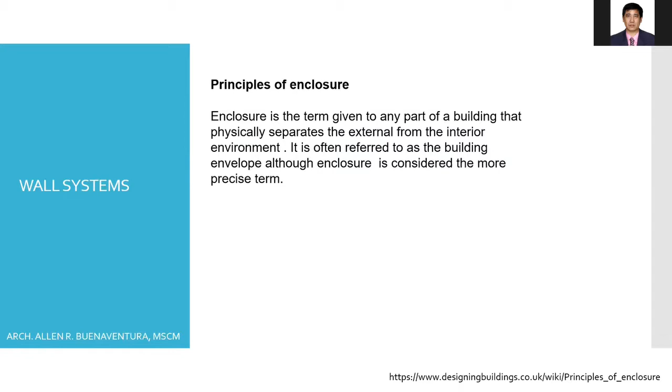Wall systems. Principles of enclosure. Enclosure is the term given to any part of a building that physically separates the external from the interior environment. It is often referred to as the building envelope, although enclosure is considered the more precise term.

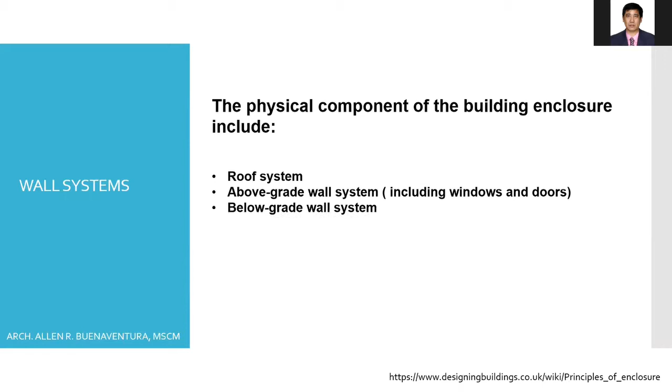The physical components of the building enclosure include the roof system, the above-grade wall system, including windows and doors, the below-grade wall system, and the base floor system. The principles of building enclosure were defined by the building scientist Neil Hutcheon in 1963.

It should have strength and rigidity, control of heat flow, control of airflow, control of water vapor flow, control of liquid water movement, stability and durability of materials, fire, aesthetic considerations, and cost.

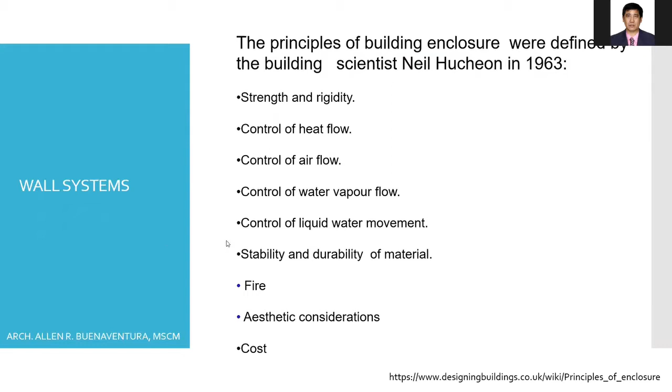Burnett and Straube said enclosure is a separation between the interior and exterior environment that experiences a variety of loadings, including but not limited to structural loading, both static and dynamic, and heat, air, and moisture loads. The enclosure must then control these loads and support these loads. This includes both short-term and long-term loadings.

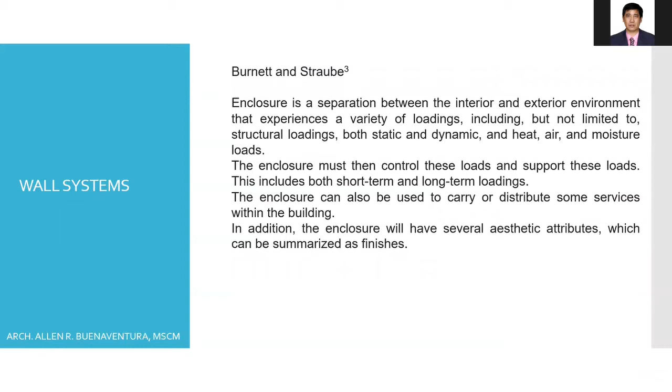The enclosure can also be used to carry or distribute some services within the building. In addition, the enclosure will have several aesthetic attributes which can be summarized as finishes. Burnett and Straube have defined 4 general building enclosure function categories. All enclosure elements have to provide the following functions.

Support. Enclosures, including exterior wall systems, must be capable of withstanding internal and external forces applied to them. The majority of these forces are structural loading. The loads include both static and dynamic loading, including but not limited to dead load, live load, wind load, earthquake loads, and possible blast loads. These loads have to be properly supported, resisted, and transferred.

Control. Enclosures, including wall systems, have to be able to control mass, energy, and particulate flow within and across the system. This includes but is not limited to heat, air, moisture, smoke, odor, fire, blast, birds, and insects.

Finish or aesthetics. The finish function of both the exterior and interior is the aesthetics of the finished surface, the visual, textural, and other aspects the designer wishes to convey with the visible elements of the system. Of the enclosure, wall systems typically have the largest consideration for finish. Distribution of services. This function relates to the distribution of services through a building, both within a single element and also through multiple elements.

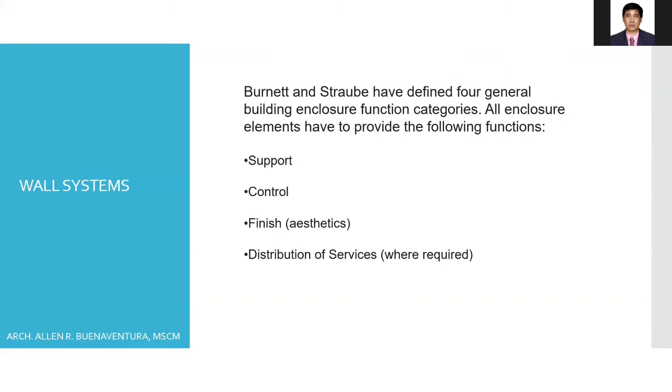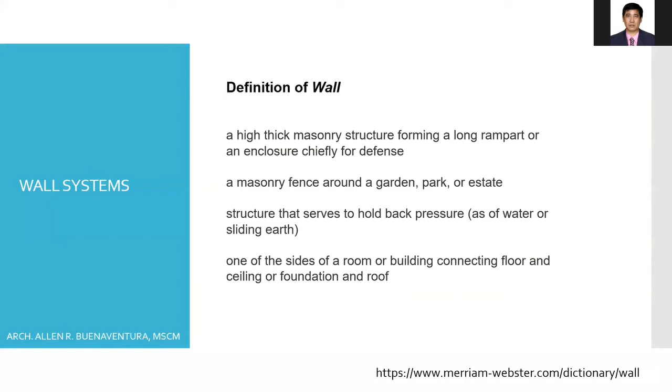The definition of a wall is a high, thick masonry structure forming a long rampart or enclosure chiefly for defense. It's also a structure that serves to hold back pressure, as of water or sliding earth. It's one of the sides of a room or building connecting floor and ceiling or foundation and roof. It's from the Merriam-Webster Dictionary. There are different basic wall types.

We have the cavity wall. A cavity wall is a wall formed by the inner skin and outer skin of masonry, sometimes referred to as leaves if they are single unit wide, connected by ties but separated by a cavity. The masonry is formed by units such as brick, stone, or block. Very generally, if the external walls of the building are less than 30 centimeters thick, they are unlikely to include a cavity.

Cavity wall insulation is used to reduce heat loss through a cavity wall by filling the air space with material that inhibits heat transfer. This immobilizes the air within the cavity, preventing convection, and substantially reduces space heating costs.

We also have the barrier wall. The barrier wall is used to refer to a system of exterior wall assembly that maintains weather tightness by preventing the intrusion of air, water, and vapor. Barrier walls rely on the integrity of the outermost surface and construction joints and are considered a cost-effective alternative to cavity or solid wall assemblies. The cladding material should be impervious to the elements.

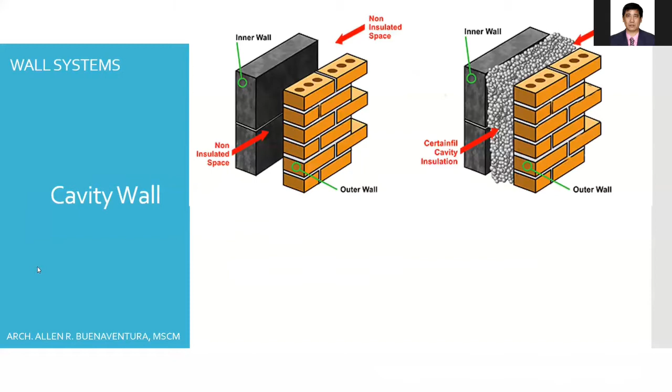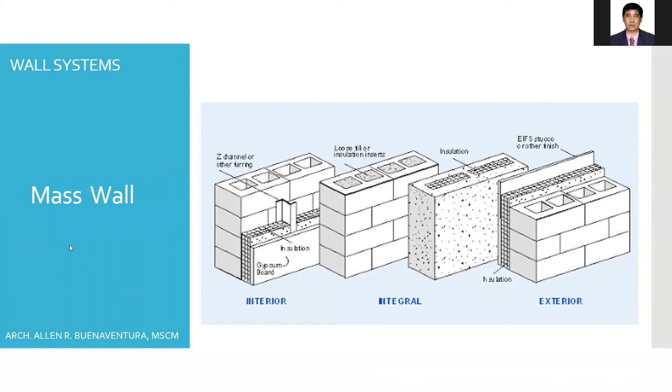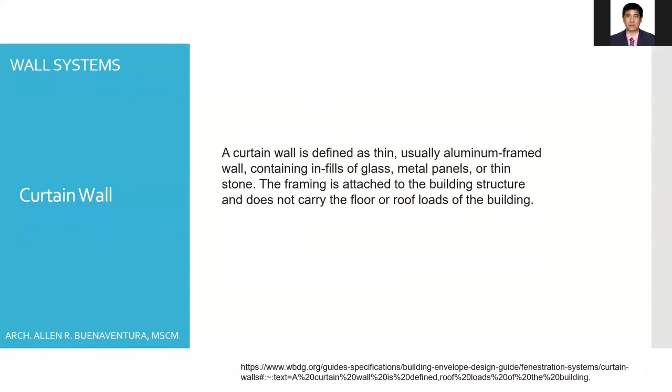A curtain wall is defined as a thin, usually aluminum frame wall containing infills of glass, metal panels, or thin stone. The framing is attached to a building structure and does not carry the floor or roof loads of the building. In the basic concept of cladding systems, we have the load-bearing wall and the curtain wall.

Load-bearing walls are walls that act as part of the structural system. They assist in supporting a building. Until late in the 19th century, all large buildings were built using load-bearing walls. Modern-day load-bearing walls usually utilize higher strength masonry and concrete and added components such as steel reinforcing, insulation cavities, flashing, air barriers, and vapor retarders. Load-bearing walls are now used in low and medium-rise buildings.

The concept of the curtain wall was developed in the late 19th century with the advent of skyscraper design. In a curtain wall system, the interior structural system supports the load of the building. The exterior wall of each floor does not support any load except its own weight and is attached at each story of the building frame. The exterior cladding is virtually a suspended curtain of material. Curtain walls may be constructed in place or prefabricated beforehand. They can consist of masonry, concrete, metal, and glass.

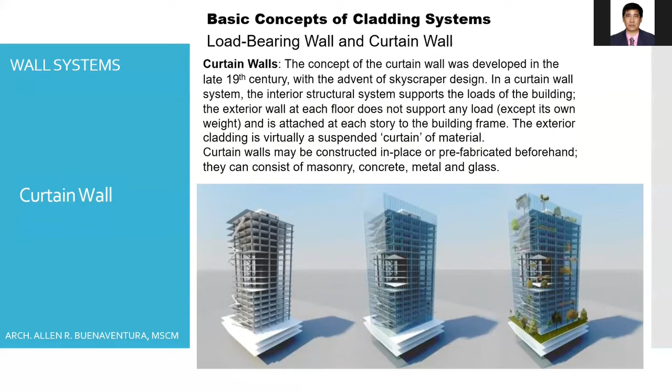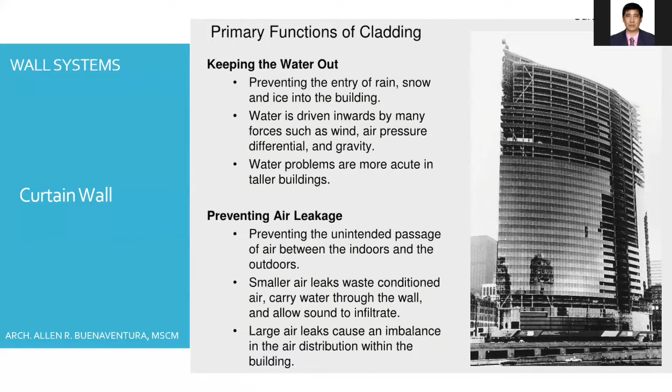The primary function of cladding is keeping the water out, preventing the entry of rain, snow, and ice into the building. Water is driven inwards by many forces such as wind, air pressure differential, and gravity. Water problems are more acute in taller buildings. It also prevents air leakage, the unintended passage of air between the indoors and outdoors. Smaller air leaks waste air-conditioned air. They carry water through the walls and allow sound to infiltrate. Large air leaks can cause an imbalance of air distribution within the building.

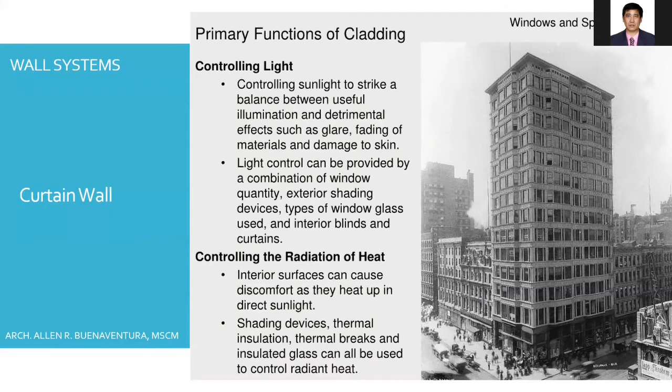A primary function of cladding is controlling sunlight to strike a balance between useful illumination and detrimental effects such as glare, fading of material, and damage to skin. Light control can be provided by a combination of window quantity, exterior shading devices, types of window glass used, and interior blinds and curtains. It also controls the radiation of heat. Interior surfaces can cause discomfort as they heat up in direct sunlight. Shading devices, thermal insulation, thermal breaks, and insulated glass can all be used to control radiant heat.

The primary function of the cladding is also controlling the conduction of heat. Resisting the conduction of heat into and out of the building requires insulation and avoidance of thermal bridges. Thermal insulation requirements often are specified by municipal codes. It also controls sound, acoustically isolating the interior of the building from the sounds of the outside. Sound requirements will vary by building type and location.

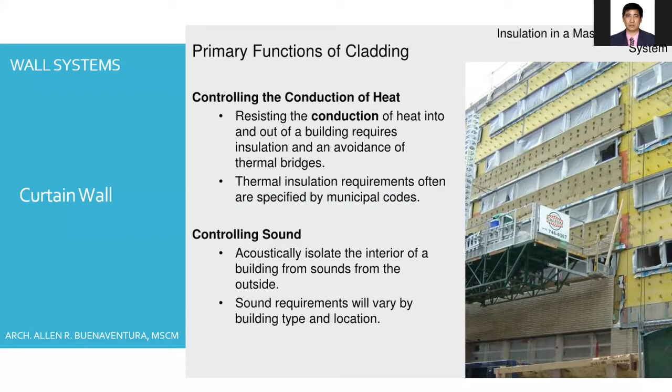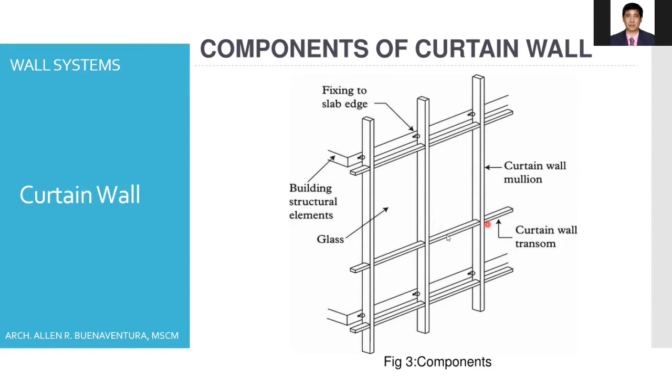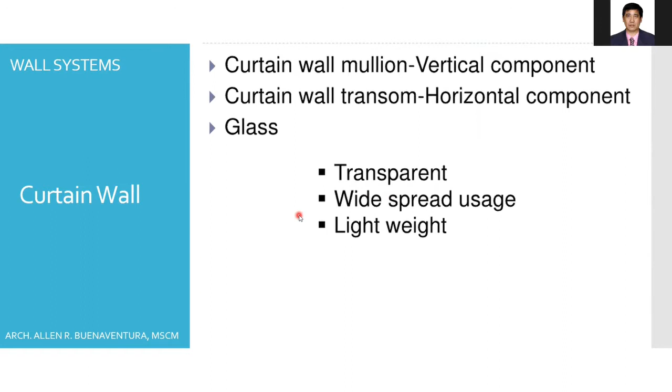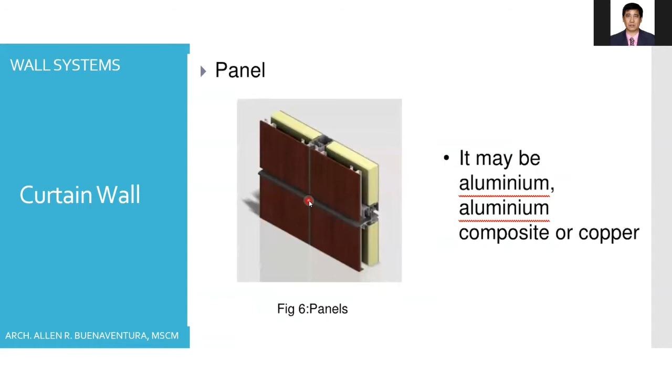These are the components of a curtain wall. We have the building structural elements, the fixing to slab edge, the curtain wall mullion, the curtain wall transom, and the panel or glass. The curtain wall mullion is the vertical component, the curtain wall transom is the horizontal component, and the glass or cladding finish can be glass, metal, or aluminum. We also have different types of cladding: the brick veneer, the stone veneer, and the panel, which may be aluminum, aluminum composite, or copper.

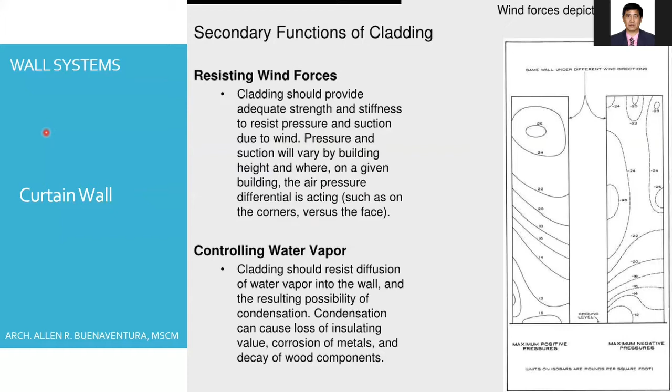A secondary function of the cladding is resisting wind forces. Cladding should provide adequate strength and stiffness to resist pressure and suction due to wind. Pressure and suction will vary by building height and where on a given building the air pressure differential is acting, such as on the corner versus the facade. It also controls water vapor. Cladding should resist diffusion of water vapor into the cavity walls and the resulting possibility of condensation. Condensation can cause loss of insulating value, corrosion of metal, and decay of wood components.

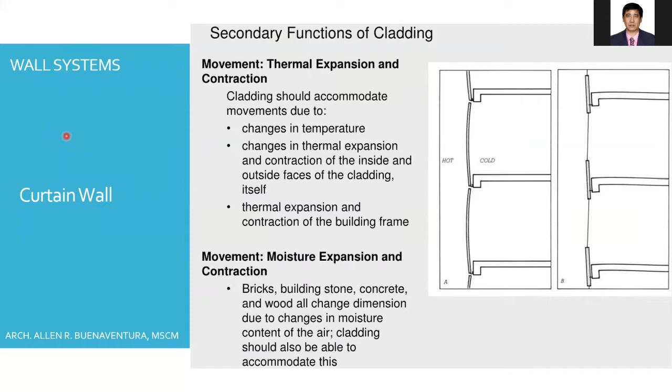Another secondary function of the cladding is accommodating movement like thermal expansion and contraction. Cladding should accommodate movements due to changes in temperature, thermal expansion and contraction of the inside and outside faces of the cladding itself, and thermal expansion and contraction of the building frame. It also accommodates moisture expansion and contraction. Bricks, building stone, concrete, and wood all change dimension due to the change in moisture content of the air. Cladding should also be able to accommodate this.

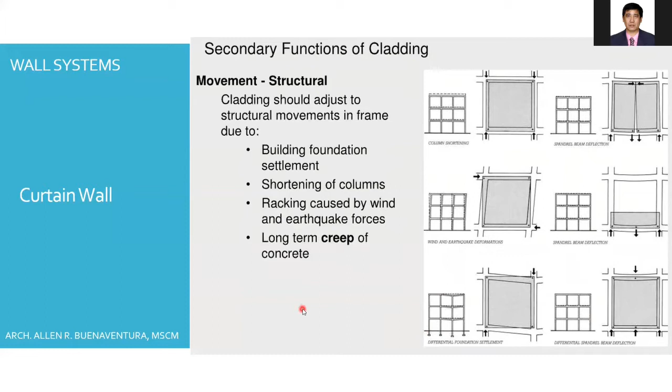The function is also structural. Cladding should adjust to the structural movements in the frame due to building foundation settlement, shortening of columns, racking caused by wind and earthquake forces, and long-term creep of concrete. As you can see here, this is the shortening of the column. This is the spandrel beam deflection. This is the wind and earthquake deformation. And this is the differential foundation settlement and the differential spandrel beam deflection. So this should also be addressed by the cladding.

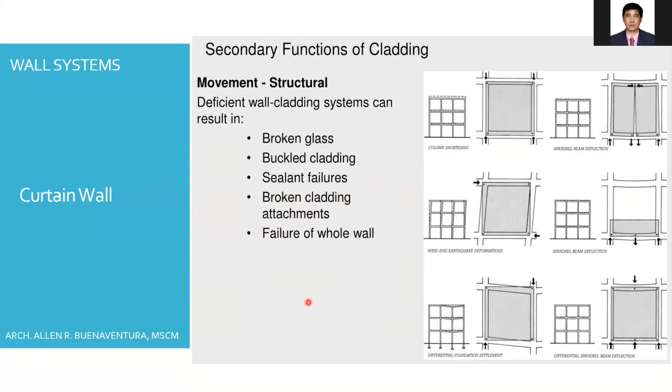Address in movement. So the cladding should have a capacity for this movement. The structural deficiency of the cladding system can result in broken glass, buckled cladding, sealant failure, broken cladding attachment, and failure of the whole wall. So the cladding should be strong enough to address all of this movement.

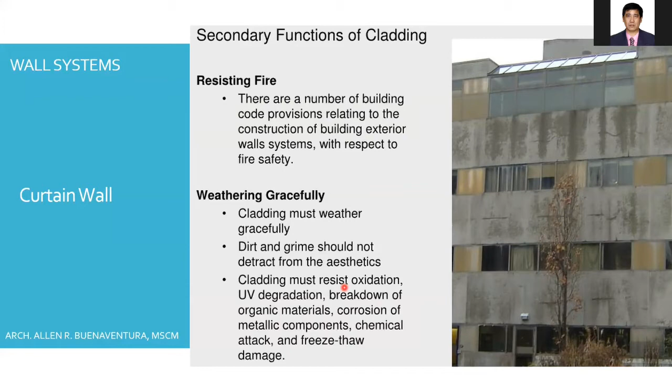So it means that the cladding can also be maintained. You can clean the cladding so that it can lengthen its time in appearance. These are the conceptual approaches to water tightness in cladding. There are 3 required conditions for water penetration. We have the water. Water must be present on the face of the exterior wall for it to penetrate into the wall. So there should be water in order to have penetration of water inside the building.

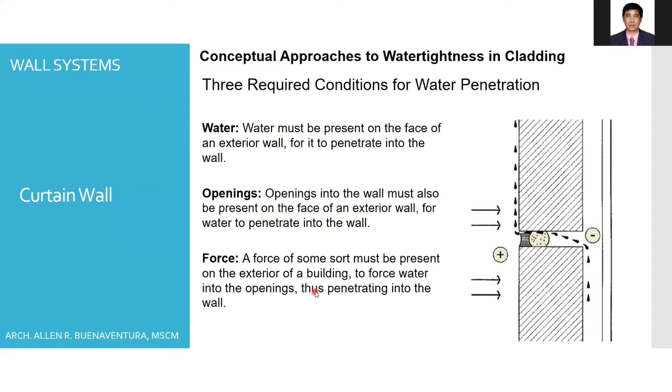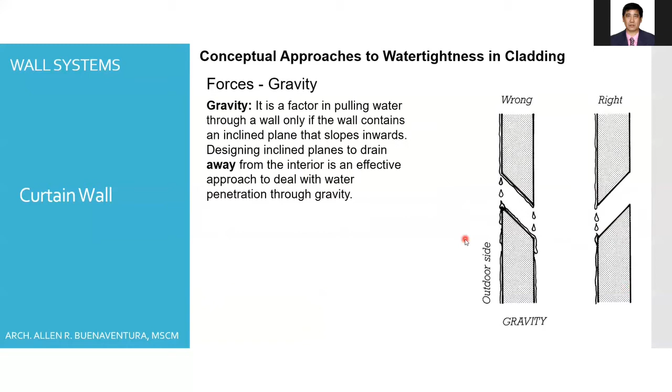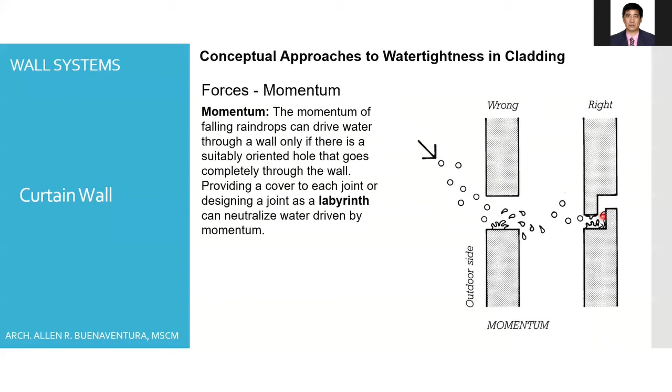Another one is the force of momentum. The momentum of falling raindrops can drive water through the wall only if there is a suitably oriented hole that goes completely through the wall. Providing a cover to each joint or designing a joint as a labyrinth can neutralize water driven by momentum. As you can see, if it's a clear opening, the water can penetrate. But if there is a labyrinth type opening, the water will not penetrate.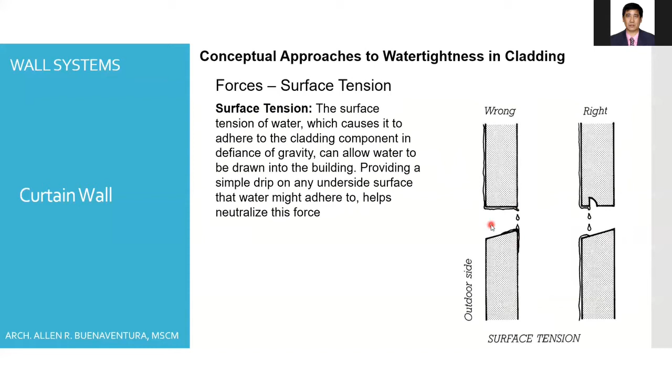Another force is surface tension. The surface tension of water, which causes it to adhere to the cladding component in defiance of gravity, can allow water to be drawn into the building. Providing a simple drip on any underside surface that the water may adhere to helps neutralize these forces. As you can see, if there's no drip mold on the upper part of the cladding, the water can penetrate inside. If there is a drip mold, the water will drip before penetrating inside the cavity or the opening.

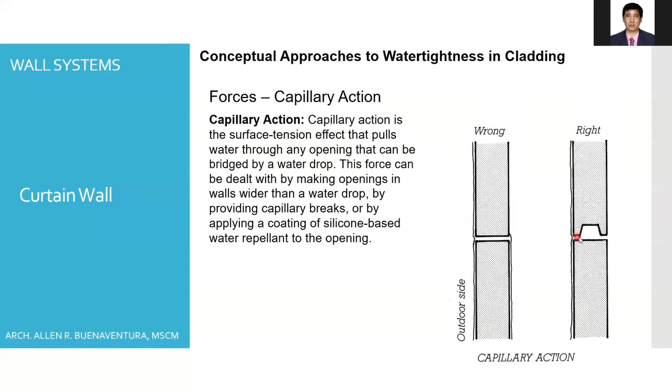Another one is capillary action. Capillary action is the surface tension effect that pulls water through any opening that can be bridged by a water drop. This force can be dealt with by making openings in the walls wider than the water drop, by providing capillary breaks, or by applying a coating of silicone-based water repellent to the opening. As you can see, this is almost like the drip mold, but this one is because of the capillary action, so that the water will not penetrate inside the cladding.

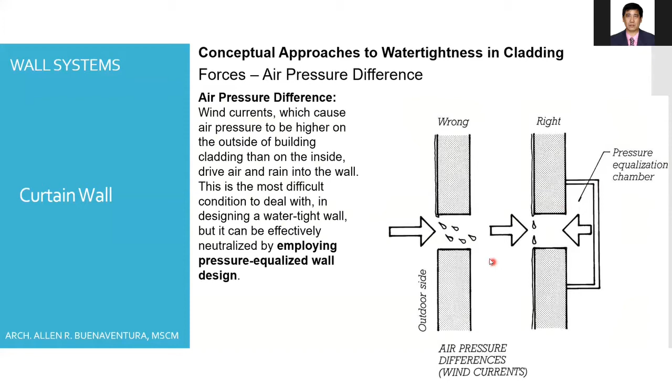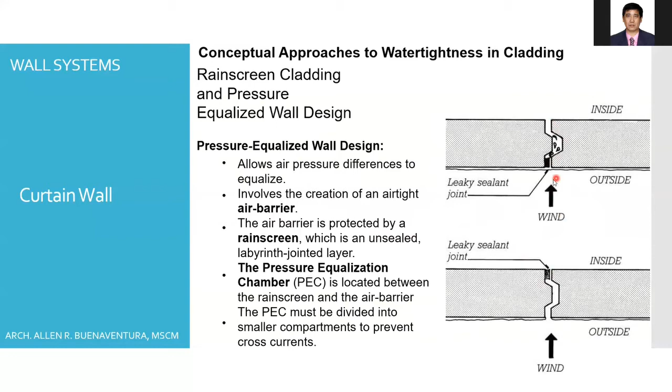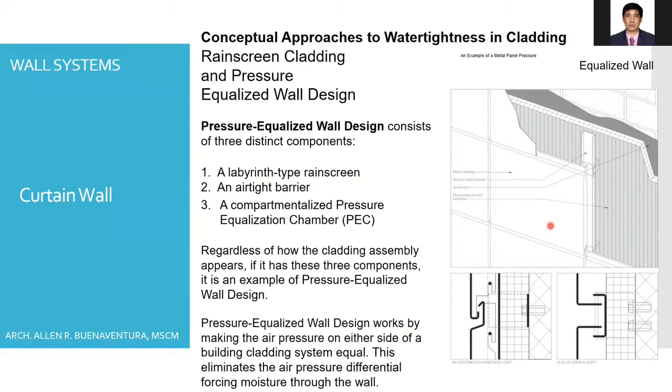Another one is the pressure equalized wall design: a labyrinth type rain screen, an airtight barrier, and a compartmentalized pressure equalization chamber. Same as the previous detail that was shown. Okay. So this is also the pressure equalized wall design.

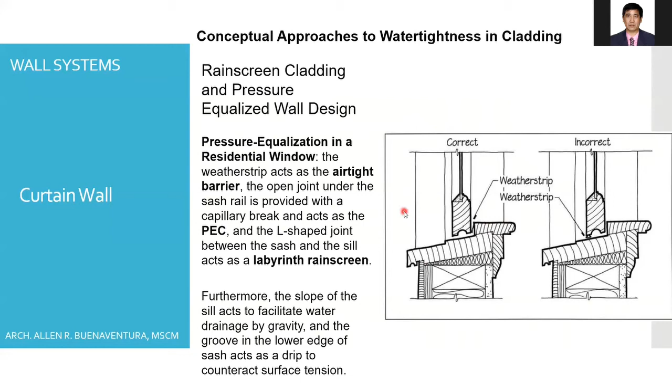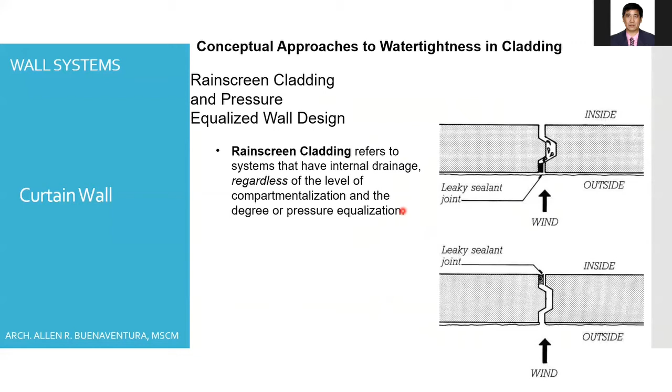So rain screen cladding and pressure equalized wall design refers to the system that has internal drainage regardless of the level of compartmentalization and the degree of pressure equalization.

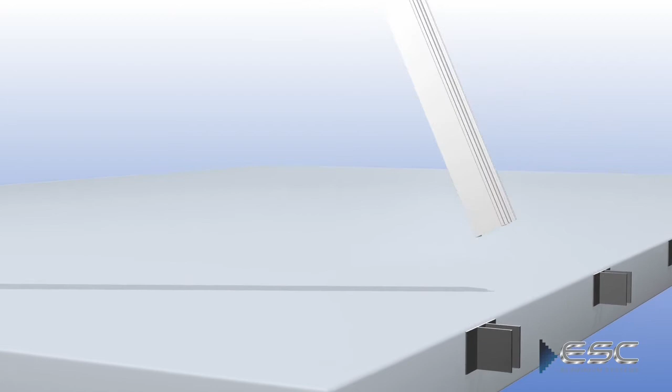The FW150 series is one of the most advanced and innovative curtain wall systems developed and engineered by ESC. The patented profiles, latches and spring-loaded mechanisms provide a complete, easy and safe curtain wall system, making its installation efficient and cost-effective. Mullion installation. Installing the mullions and making sure they are properly aligned has never been this efficient. The mullions are fitted with teeth plates, which allow each mullion to be aligned accurately and effortlessly.

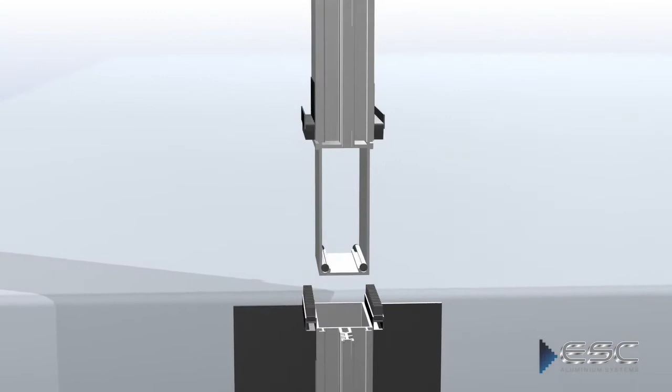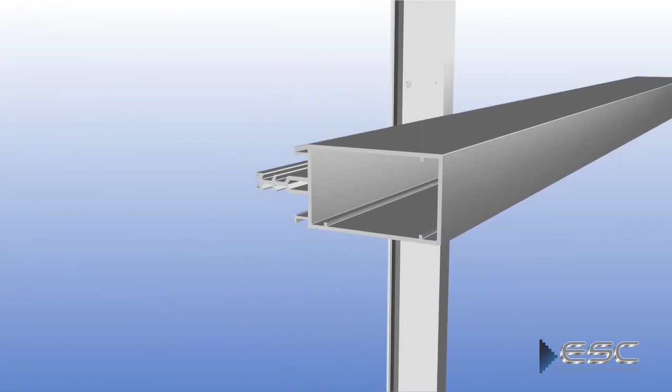For extensions, the mullion expansion profiles provide a tight, accurate fit with adequate space for expansion and contraction. Our specially designed rubber gaskets are also installed on the mullions from the inside of the structure. Transom installation. Unlike conventional systems, the transom is attached to the mullion with the use of the spring-loaded transom latch, which supports more weight and can be installed from the inside of the structure with unmatched speed and the highest level of safety. A rubber gasket is also fitted between each mullion and transom to compensate for expansion and contraction, reduce stress on the brackets, and eliminate noise.

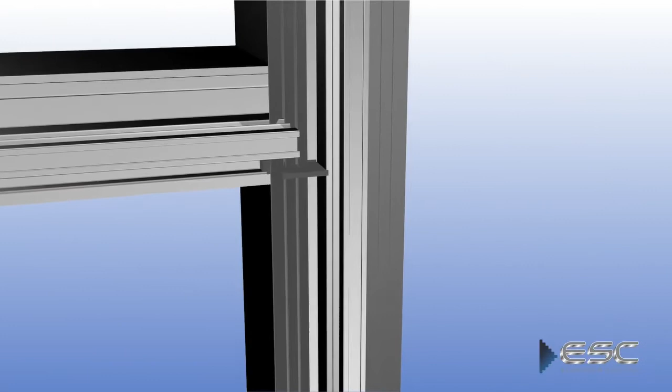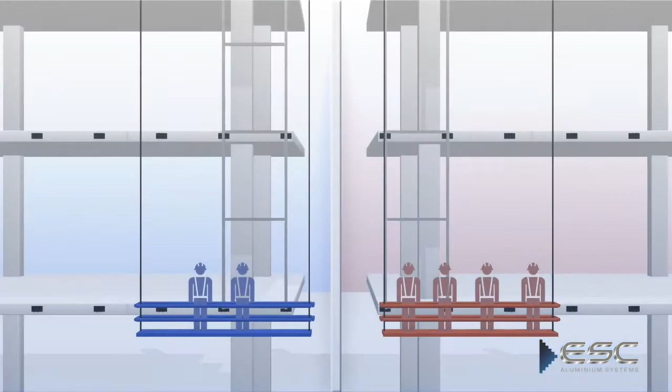On both ends of the transom, a water drainage system is installed that channels the water away from the glass panels and into dedicated drainage channels within the mullions. This eliminates the time and labor-intensive method for water drainage in conventional systems. Our specially designed rubber gaskets are also installed on the transoms from the inside of the structure. Efficiency. This overall method of installation reduces the time needed to install the transoms and the gaskets from the outside using conventional cradles, making this the fastest stick system on the market for high-rise buildings.

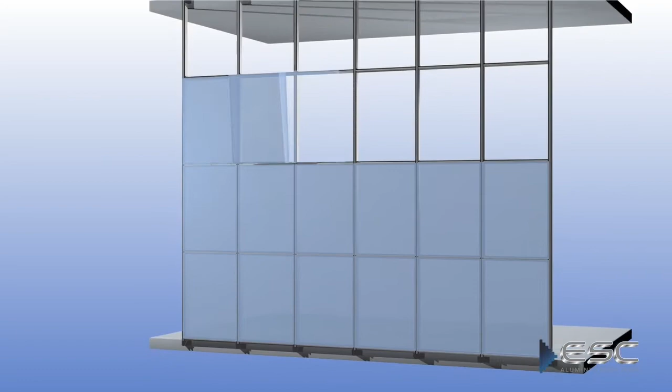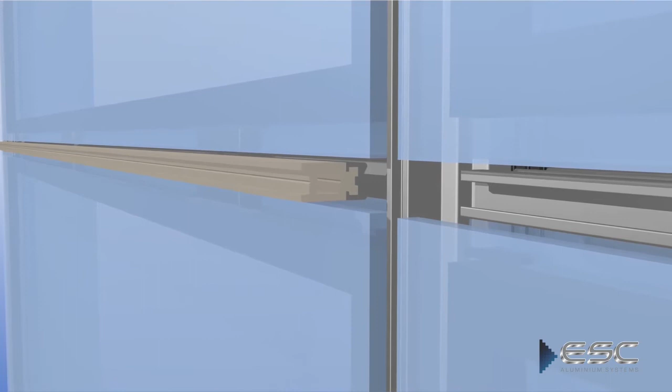Glass panel installation. Our patented spring-loaded latches are pre-installed in the U-channel of the glass panels. While installing the glass panels, the latch system snaps perfectly into the mullions and the transoms, speeding up the installation without the need of screws that can break and be skipped during conventional installation. An additional gasket is installed between the glass panels in a dedicated channel to tightly fit the panels together and dramatically reduce the application of silicone filler from the outside. For insulation, a thermal strip can also be installed between glass panels. This reduces heat conduction between the exterior and the interior of the structure. For aesthetics, a pressure plate can be installed on top of the thermal strip.

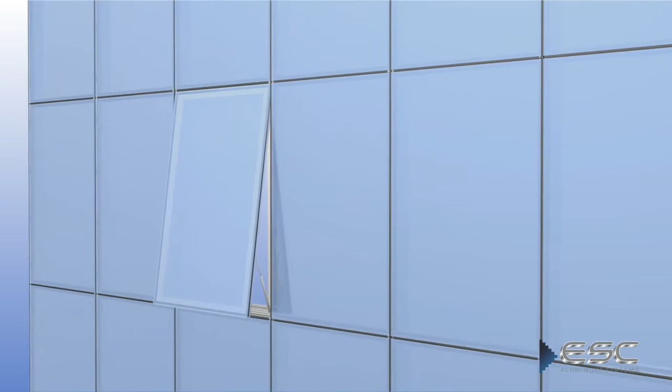Window shutter. Our patented window shutter technology proved to be more secure than conventional stay-arm systems. The window shutter is fitted with a concealed hinge. It carries the weight of the glass panel while ensuring stability and safety. The hinge is concealed for aesthetic purposes. A restriction arm secures the window opening according to requirements.

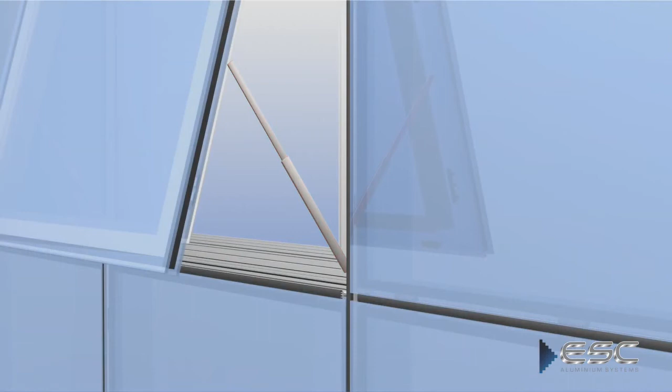Maintenance. For maintenance or replacement purposes, a special key and plate are used on the perimeter of the panel that needs to be replaced. The panel is easily removed with minimum time and effort with no damage to surrounding panels. The transoms can be removed and replaced with minimum requirements without the need to alter or damage other mullions or transoms, effectively reducing time and cost. The FW150 series means less labor, less machinery, less transportation, and is quickly, easily and safely installed. It is the most cost-effective, innovative aluminium system on the market.

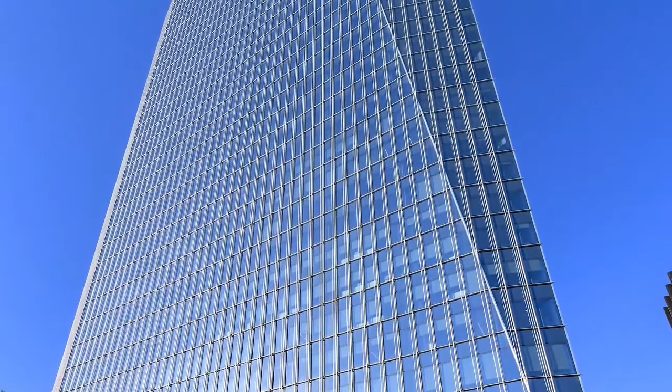As a leader in the curtain wall industry, we work on buildings from towers to campuses and incorporate features such as angles, curves, lighting, and metal accents. But what is curtain wall? Curtain wall is a high-performance building facade, the envelope surrounding the structure. It's critical to both the functionality and energy performance of the building.

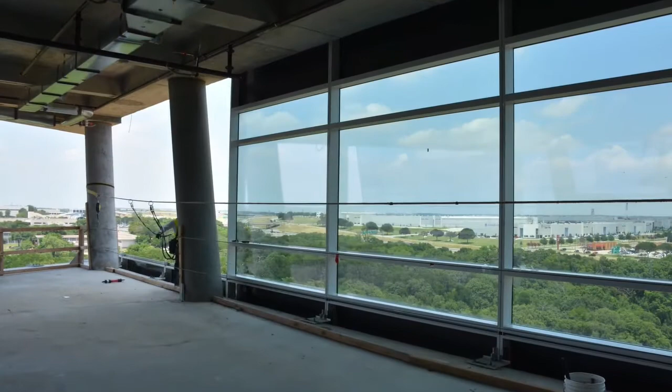But it's more than that. It's the first impression, the face of our client's business and their brand. It is the thumbprint on the skyline of our cities. So, how do we install curtain wall? At Harmon, we primarily install UCW 8000, our high-performance curtain wall system, which is fabricated, assembled, and glazed at our 4 manufacturing facilities across the U.S.

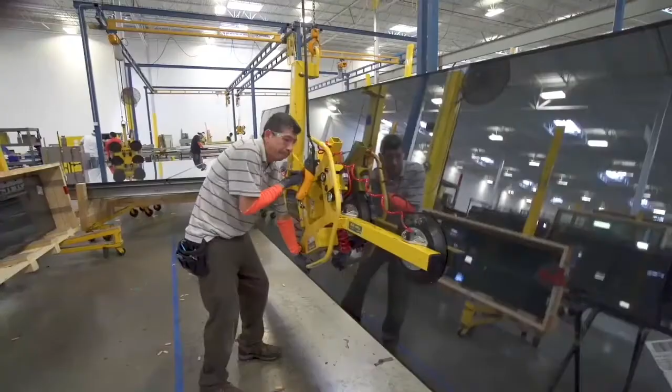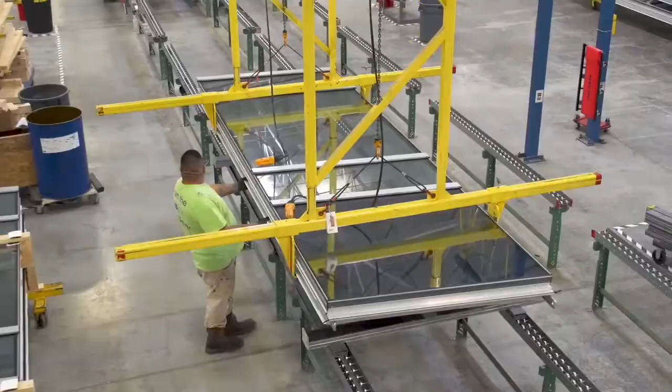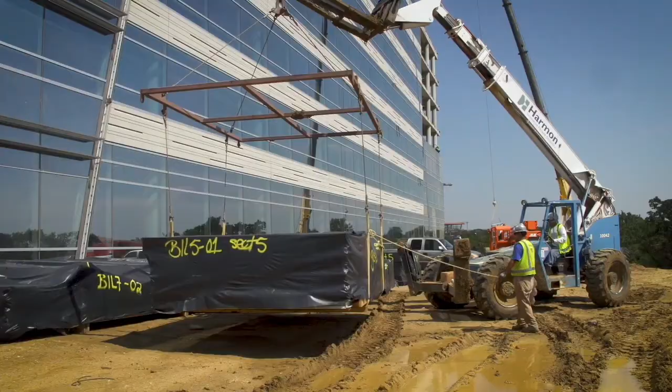Manufacturing in a controlled environment versus in the field reduces the impact weather can have on the install schedule, allows us better quality control, and requires less time in the field. The completed glazed units are shipped ready for installation to the job site, normally packed in bunks of 4 units each. These deliveries are sequenced with the install schedule so that typically only 1 floor of units is delivered at a time, reducing the amount of space required on site to store material.

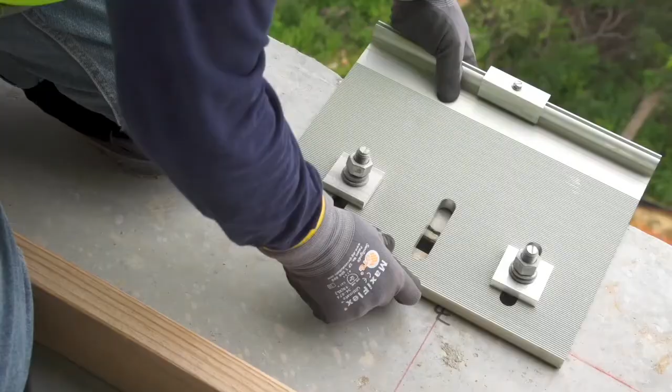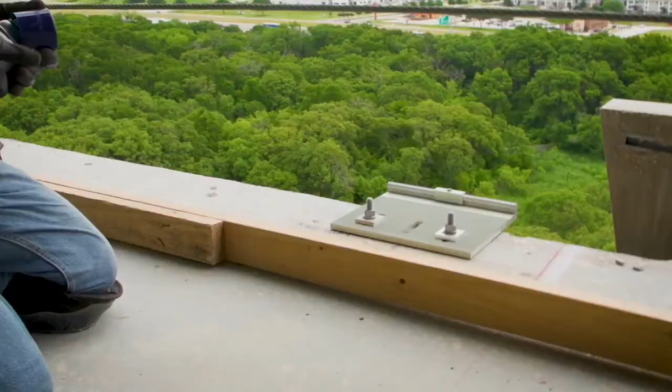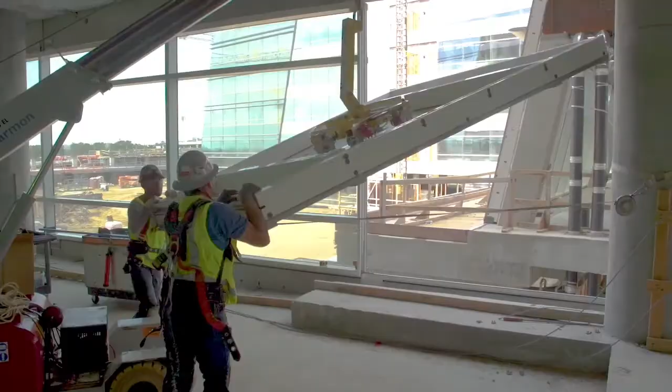At the job site, the first step is to install the anchors that will be used to place the curtain wall. We use total station surveying equipment to precisely and efficiently set layout points for the curtain wall anchors. Once installation is complete, they are marked blue so the other trades know they can complete the steps outside of Harmon's scope. The curtain wall units are then staged in sequence and lifted into place using a crane either from the ground or from inside the building. As each unit is raised, team members guide it into place.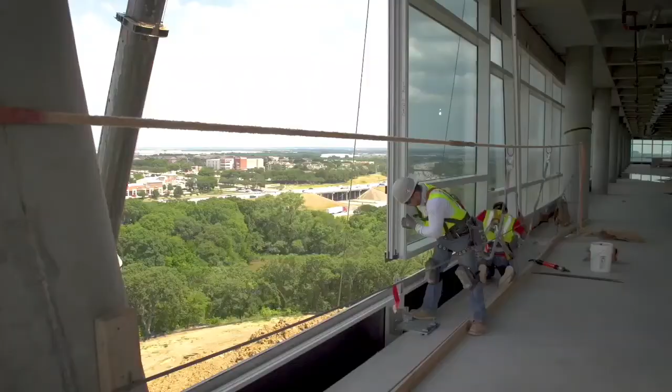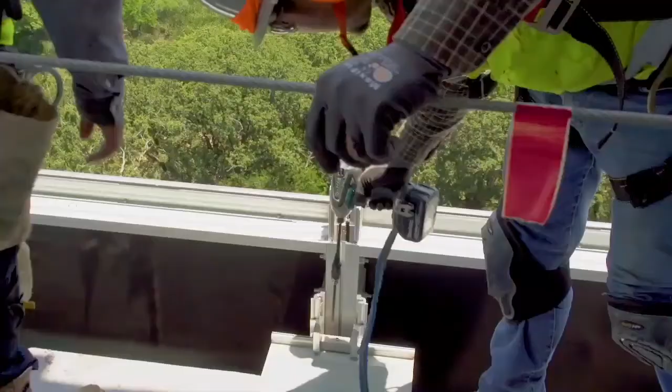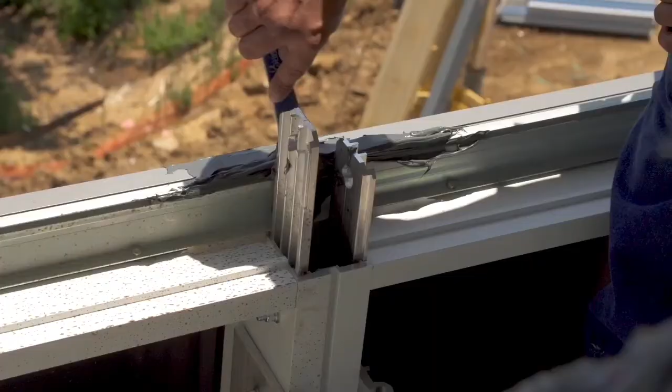One of the benefits of curtain wall is that the installation requires only a small install crew of typically 6 team members, which helps to keep manpower costs at a minimum. Once the unit is placed, it is locked into the curtain wall anchors and adjusted to fine-tune the elevation. The placement is then checked for accuracy using a site level or rotating laser. A weather-resistant sealant is applied to each of the curtain wall seams. This helps to create one of the most airtight, weather-resistant building facades available today.

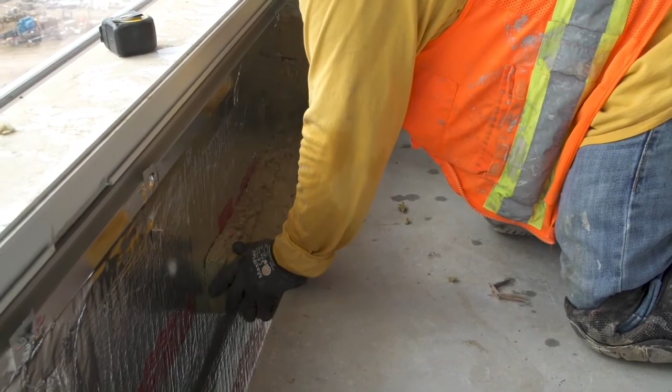Next, fire protection foam is cut to fill the gap between the floor and the curtain wall unit. In the case of a fire, the foam helps to contain the fire to one floor, rather than moving to the next floor above or below. Smoke seal is then applied to the foam to cover any small gaps.

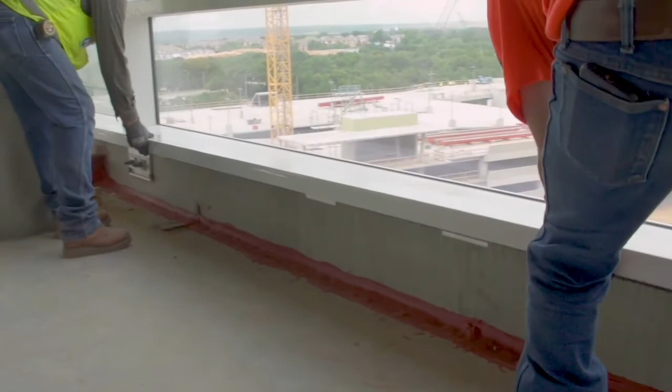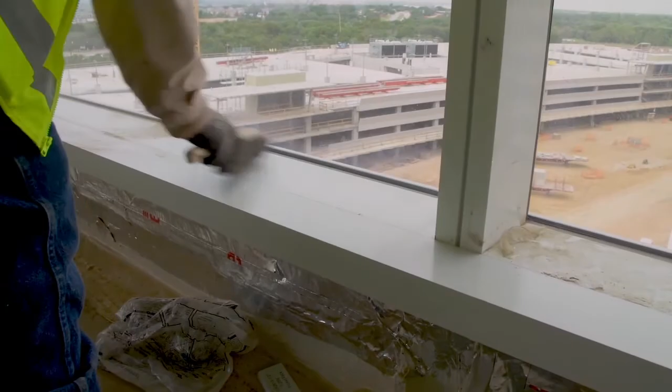Finally, we complete the interior by placing the sill brackets and installing the windowsill extension, also known as stool trim. The stool trim gives a finished look to the curtain wall system. It is hammered into place to ensure a tight fit, and then cleaned to remove any residue. A temporary coating is applied to protect the metal during the interior construction process. This sealant is simply peeled off once construction is complete.

With more than 6 decades in the construction business, we bring our high-quality standards, a culture that insists on safety at every level, a process based on collaboration, and a constant desire to find new ways to do things smarter to every project we work on. This is what makes Harmon one of the most trusted partners in the country to bring building facade projects from design to reality.

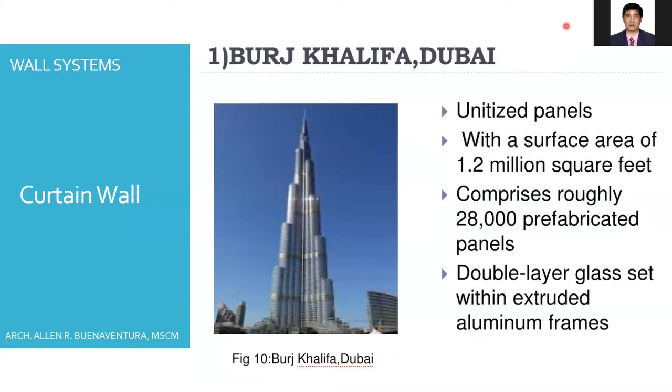These are the different types of curtain wall installed in actual projects. We have the Burj Khalifa in Dubai. It's a unitized panel with a surface area of 1.2 million square feet. It comprises roughly 28,000 prefabricated panels. It's double-layered glass set within an extruded aluminum frame.

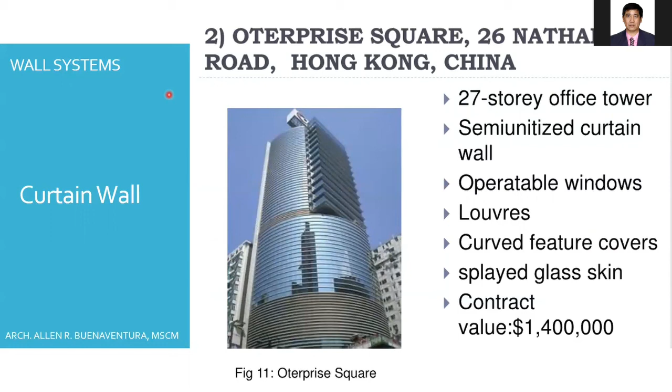Another one is the Oterprise Square, 26 Nathan Road in Hong Kong, China. It's a 27-story office tower, semi-unitized curtain wall, operable windows, louvers, and curved feature covers. Splayed glass skin. The contract value is about $1.4 million.

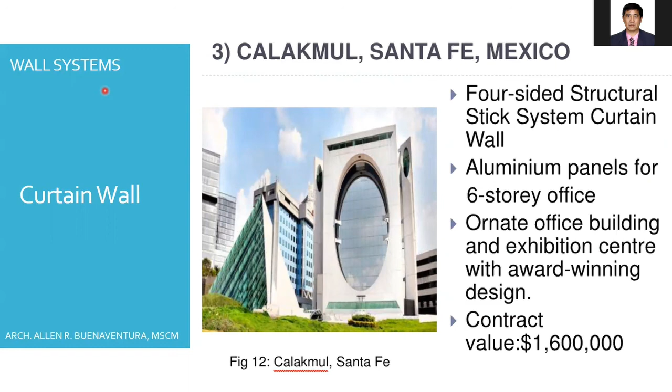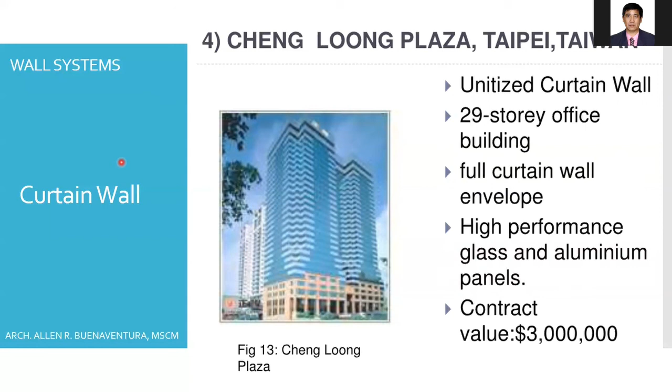Another one is the Calakmul, Santa Fe, Mexico. It's a 4-sided structural stick system curtain wall, aluminum panel for a 6-story ornate office building and exhibition center with award-winning design. The contract value is about 1.6 million US dollars. Another one is the Cheng Loong Plaza. It's a unitized curtain wall, 29-story building, full curtain wall envelope, high-performance glass and aluminum panels. The contract value is about 3 million US dollars.